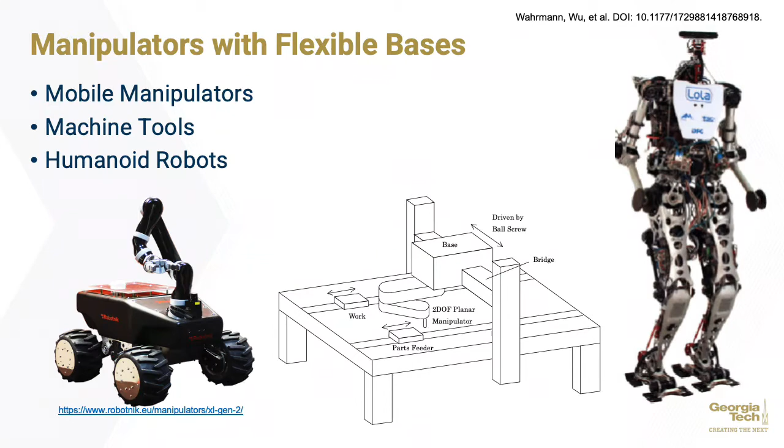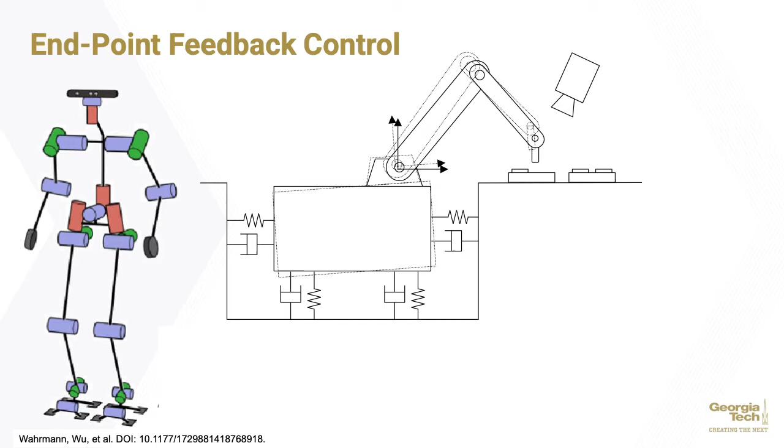We are interested in robust control of a manipulator on a flexible base. The base of the link mechanism is not always rigid in many manipulator systems, such as mobile manipulators, machine tools, and humanoid robots. We want to apply task space control of the end effector for precise positioning to a flexible base robot. Again, the flexibility of the base comes from the mechanical compliance.

If the base is also controlled, its servo stiffness can also be a source of flexibility. Even if the manipulator itself is rigid, dynamic coupling between the rigid arm and base makes the system difficult to control due to the flexibility.

I also want to mention that flexibility is difficult to measure or model in general due to a lack of high-fidelity model or simply sensors, making model-based or sensor-based approach practically impossible.

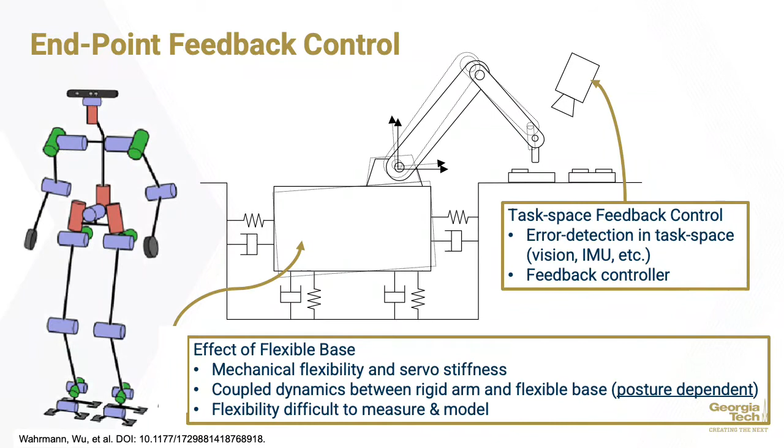To perform task space or Cartesian space control, we can use a sensor such as vision or IMU to form a closed-loop system. Note that manipulator systems, including humanoids, are redundant, meaning that multiple kinematic solutions achieve the positioning of the endpoint. Here, the question is, how can we optimally choose a posture so that we can stabilize the feedback system?

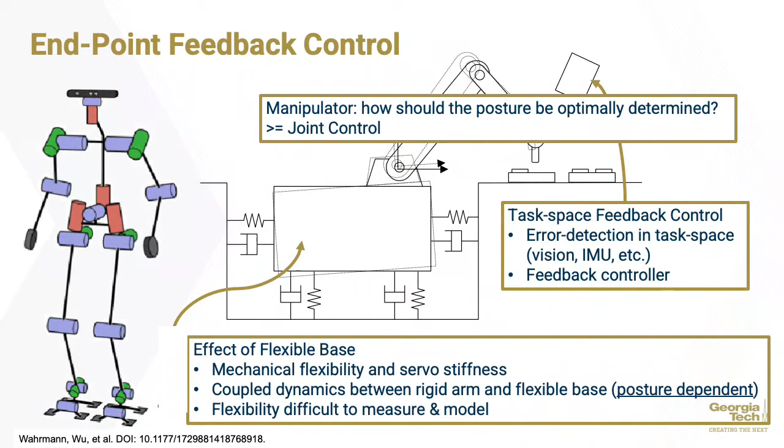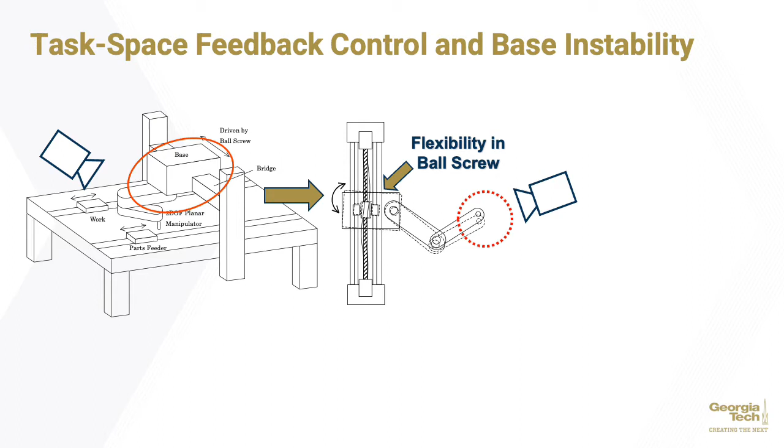The goal of study is to stabilize the feedback system by using as simple control as possible, such as task space feedback. In other words, is it allowed to neglect complex flexible base dynamics and form a closed-loop system, simply assuming that the system is completely rigid? It is not usually the case, because the flexible base robot is not a collocated system.

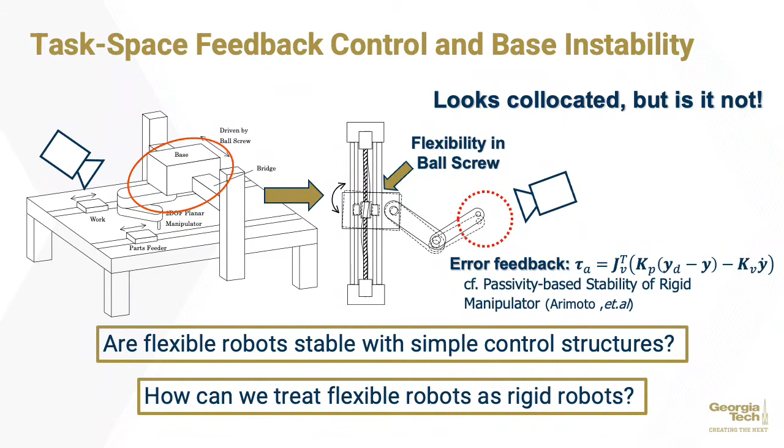Our approach is to evaluate the posture-dependent robust stability of a linearized model about the endpoint. We specifically use the margin proposed by McFarlane and Glover that identifies all stabilizing controllers. Regarding the arm postures, we expand the concept of robust arm configuration to determine the optimal posture.

Unlike many other numerical applications of H-infinity robust optimal control design, we present an analytical expression of the stability margin for a rigid body system and consider flexibility as a fluctuation.

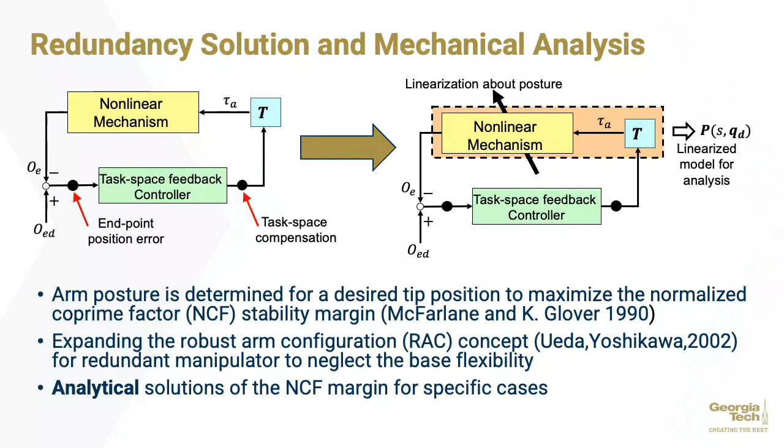We just want to give a quick review of a well-known concept about actuator sensor collocation, which is related to the positive realness of a LTI system.

If we put the sensor and actuator on the same body, the system is called collocated and known as favorable for closed-loop stability. If collocated, the phase difference between the input and output is within plus minus 90 degrees, also called in phase or minimum phase, which is equivalent to passivity of linear systems.

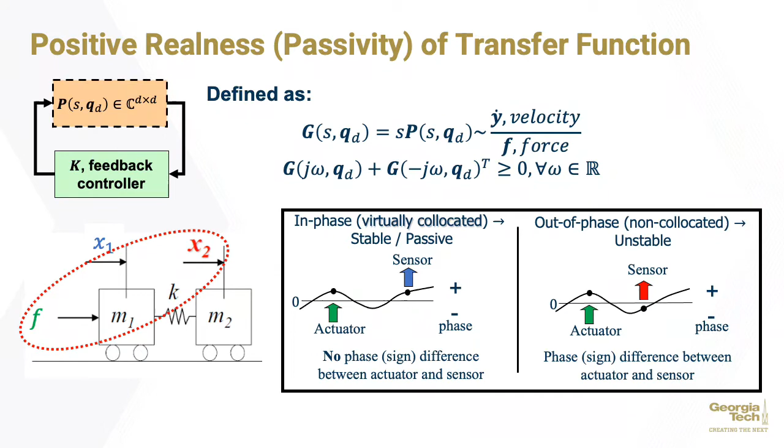On the other hand, when the sensor and actuator are on different bodies and the flexible element is between them, the situation is called out of phase, and the closed-loop system is most likely becoming unstable as the feedback gain increases.

Our interest is to extend the concept of actuator sensor collocation to multiple input, multiple output systems. Now the system dynamics is represented in the modal decomposed form.

We first see that the rigid mode is trivially lossless due to a positive definite inertia matrix, which is a well-known property. For the flexible modes, we can achieve a condition on the flexible mode shape, wherein if the coefficient matrix R is symmetric and positive semi-definite, the mode is passive.

This implies that it's possible to select a posture to achieve systemic passivity for all flexible modes. While this metric is useful, its utility is limited by the modal frequencies in the system and in the ability to do total in-phase design.

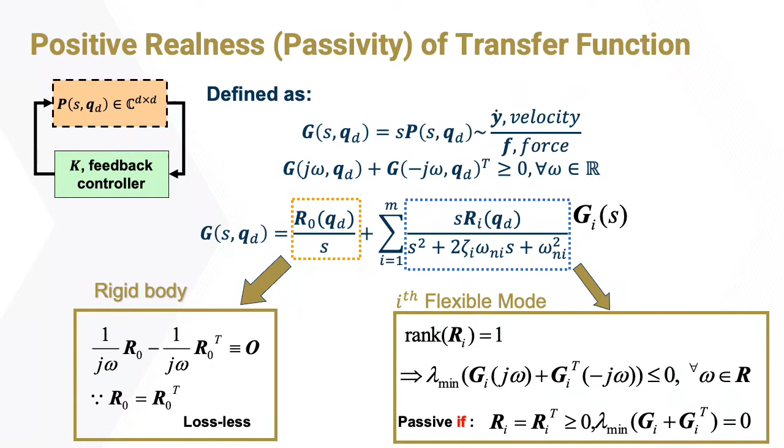For the case of MIMO systems, it is very unlikely that all flexible modes are totally in phase. An easy example to look at is this planar manipulator with 3 base flexibilities in x, y, and angular directions. The in-phase property can be evaluated across the workspace for each of its flexible modes.

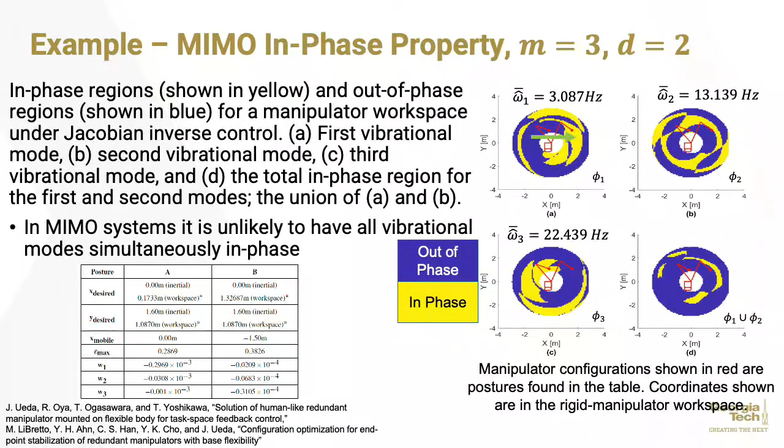The regions of these plots in yellow are regions in which the mode is in phase, and as you start to consider these modes simultaneously, the likelihood that there will be postures that are totally in phase begins to drop significantly. This problem is navigable if you have modal frequencies that are particularly far apart, which would allow the control designer to avoid excitation of those higher modes, but overall, the selected posture would still not totally be in phase.

As an alternative to the passivity index introduced previously, the normalized coprime factor stability margin can be used to describe the stability of the system on a whole. Well known in H-infinity theory, this metric describes the stability of the minimal system described by the normalized coprime factors of the open loop plant P, as well as the system's robustness to modeling errors.

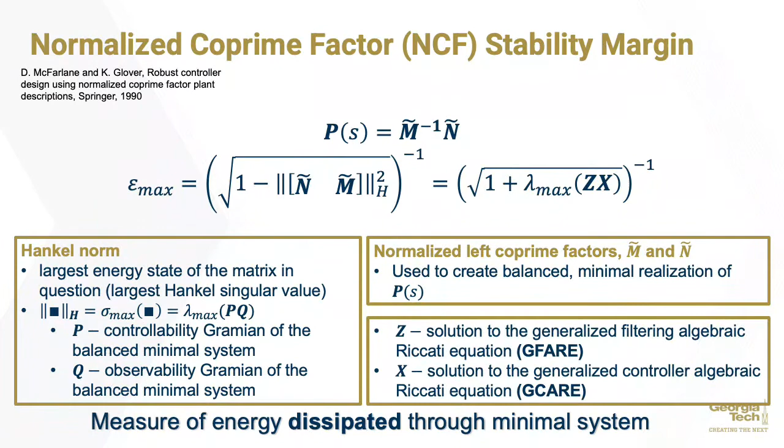At its center, the NCF stability margin requires the computation of the Hankel norm of the concatenated matrix n tilde m tilde. Or equivalently, one can use the quantity on the right, which is dependent on the solution of the generalized filtering and generalized controller algebraic Riccati equations.

The solution of Riccati equations is generally done numerically, and even then, solutions are not always guaranteed. But because we're working with systems that are balanced and minimal, we're guaranteed a solution, and moreover, the stabilizing solution is guaranteed to be symmetric positive definite.

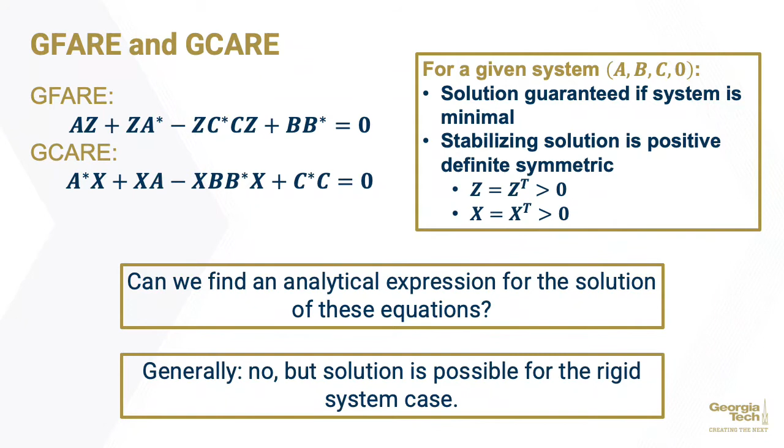The biggest question raised by all of this is how we can make definitive claims about any of these systems. For that, we would obviously need some analytical solutions so that we can make proofs one way or another. This is generally not possible, but for the class of all rigid or double-integrator systems, we have solved both the GCARE and the GFARE to find a definitive solution for the normalized coprime factor stability margin.

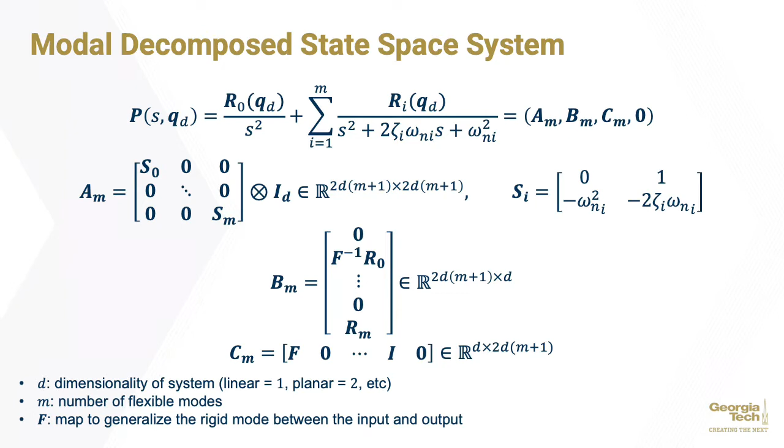As one last preliminary, it is necessary to realize the modally decomposed transfer function into a state space system. For a purely rigid system, however, we can truncate the necessary parts of the AM, BM, and CM matrices, taking care to leave the system general through using a map, which we call F, to change the distribution of the rigid mode between the input and output sides of the state space system.

As a motivating example, we can see the NCF stability margin applied to an SISO system and a planar 2R manipulator. In each of these, larger values indicate a more stable system, and in the case of MIMO systems, we can evaluate this metric at every point in the system's workspace.

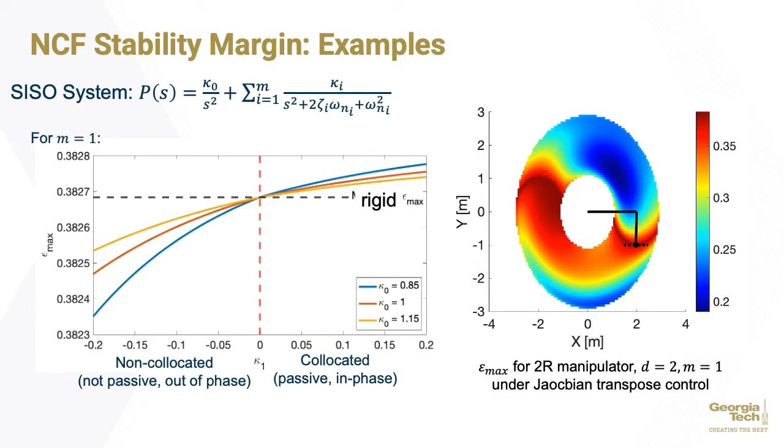Looking at the SISO system on the left, we see a clear division in the stability margin between non-collocated and collocated systems, and this boundary occurs when the system is purely rigid. This value very clearly occurs at the intersection of the above curves and seems to be constant for all values of the rigid mode.

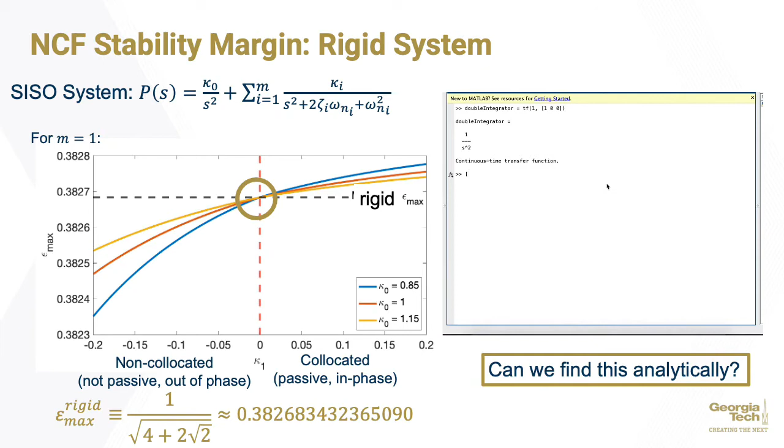This is evidenced by the evaluation of the NCF stability margin for myriad rigid systems in MATLAB and can be done using the NCF syn command. Overall, this sets a very clear performance indicator as to whether or not a multimodal system performs better or worse than its rigid subsystem. In evaluating both the GCARE and GFARE for a rigid body system, we find that the characteristic equation is equal to lambda squared minus 6 lambda plus 1 quantity raised to the n.

This means that the polynomial itself is constant with roots of multiplicity equal to the number of rigid body modes in the system. When evaluated, the maximum root of the characteristic equation yields a constant value of 1 divided by the square root of quantity 4 plus 2 root 2, which is equivalent to the value found in the MATLAB demonstration.

The important result here is that this value is constant and is shared by every double-integrator system regardless of dimensionality or redundancy. Should the manipulator be redundant, special care must be taken in the map between the task and joint space. However, this will not impact this solution.

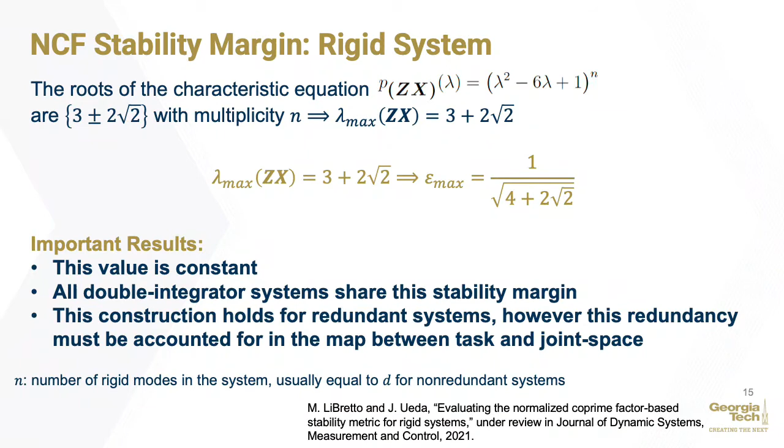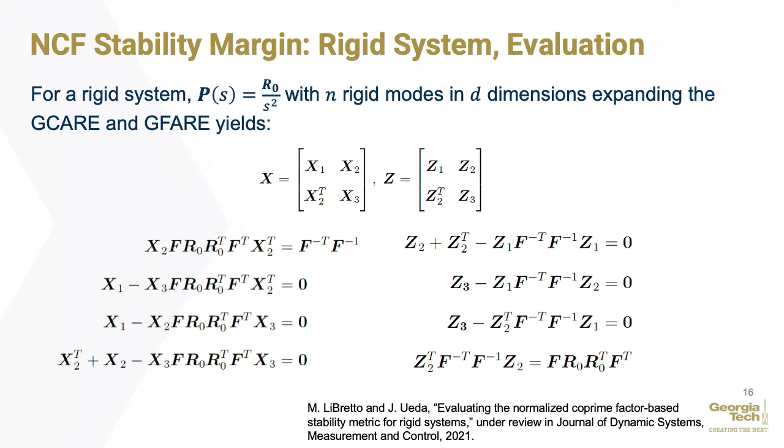We arrived at this result through the simultaneous evaluation of the set of matrix quadratic equations resulting from the blockwise expansion of the GCARE and GFARE. This solution was possible because we leveraged the positive definiteness of the rigid mode to find matrix square roots in the solution of both x2 and z2 first, then followed the rest of the algebra through.

Notably, the solutions of z and x are functions of only the rigid mode and its distribution factor f, and have a reciprocal structure of sorts. Each of the rigid body quantities in the elements of z and x are inverses of one another, and this would even be the case if there was an unequal distribution of the rigid mode throughout the input and output.

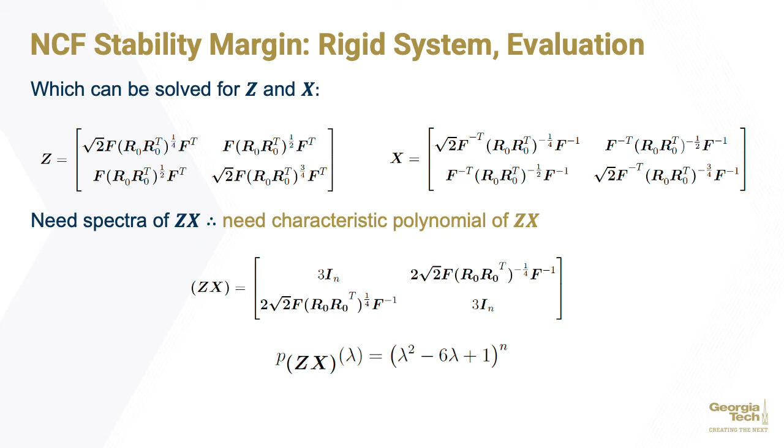When the product Zx is found and its characteristic equation is evaluated, the rigid mode terms and the off-diagonal terms cancel to identity. This results in the aforementioned constant characteristic equation despite the matrix being a function of the rigid mode. After analyzing a purely rigid case, the natural extension is to see what happens upon the inclusion of a flexible mode.

We know from our work with the modal passivity analysis that for a flexible mode to be passive, it must be symmetric positive semi-definite in rank 1. Using this, one can vary the flexible mode so that it remains passive by assigning it the structure shown on the right. In varying this residual and scaling the rigid mode in this way, the NCF stability margin for a variety of in-phase systems can be analyzed simultaneously.

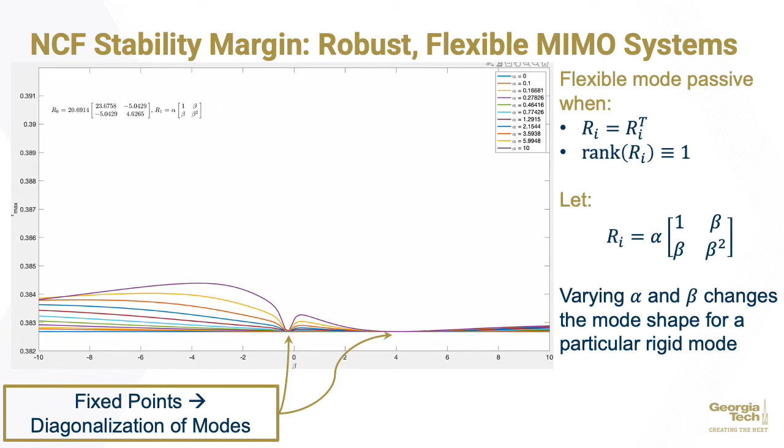It is clear from this graphic that these in-phase flexible systems have stability margins greater than or equal to that of the rigid system, indicating superior performance. Interestingly, however, two distinct fixed points occur in the plots regardless of this scaling. It is for these flexible modes that we can simultaneously diagonalize all modes in the system.

The invariance of these points with respect to the scaling of the rigid mode instructs us that these fixed points are related to the mode's invariant subspace.

Taking a step back and looking at the intuition surrounding the flexible mode as an algebraic structure, when you consider it to be a linear transformation from the input space, whether that is torque or velocity, to the task space, it is easy to see that they always project all inputs onto the span of the same line in the plane when d equals 2 or space when d equals 3.

This line is defined by the generating vector for the passive flexible mode, 1 beta. While an alpha was used in the preceding analysis, we are more worried about the span of the vector here, so the alpha may be omitted.

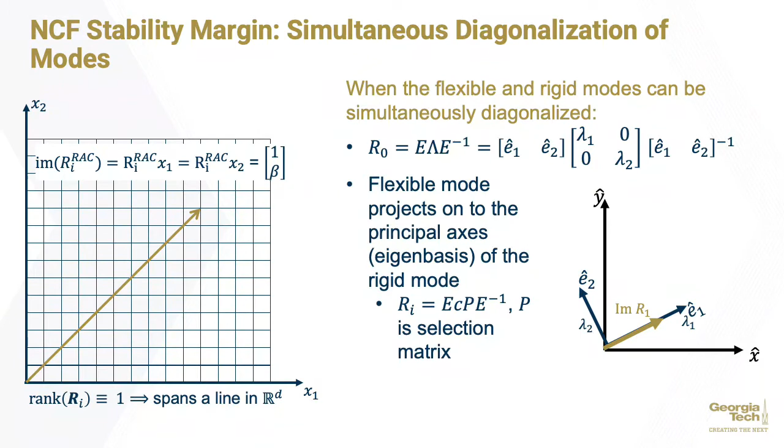When the generating vector lies along any of the principal axes of the rigid mode, that would be the vectors comprising its eigenbasis E, we can diagonalize the flexible mode so that it takes the form of the similarity transformation of a scalar times a selection matrix P.

Substituting this relationship into the transfer function representation of the flexible-body system, the expressions for each of the modes can be expanded and the basis can be factored out.

After the change of basis, the system can be recognized as G prime, which is diagonal in the invariant subspace of the rigid mode, and all of the subsystems on its diagonal are SISO. This indicates that within this eigenspace, the actions of either axis are decoupled, and the subsystems can be analyzed independently.

This diagonalization is analogous to converting the robot in question into a Cartesian robot. Each of the axes can move independently and act without inducing motion in the other for both rigid body motion as well as any induced oscillation.

It is for this reason that we can say that the overall system is only as stable as its least stable part. So how can we show that?

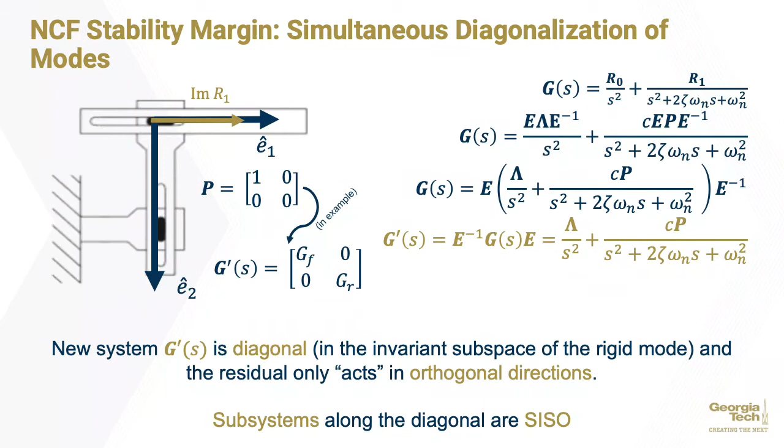If we realize the transfer function G prime as block diagonal matrices of conformal size and evaluate the GCARE and GFARE, we find that they have block diagonal solutions because of the decoupled subsystem dynamics. Therefore, the resulting characteristic equation is the product of the characteristic polynomials of each of the subsystems in the aggregate.

It is for this reason that the NCF stability margin becomes that of the subsystem with the largest root, and therefore the lowest stability margin.

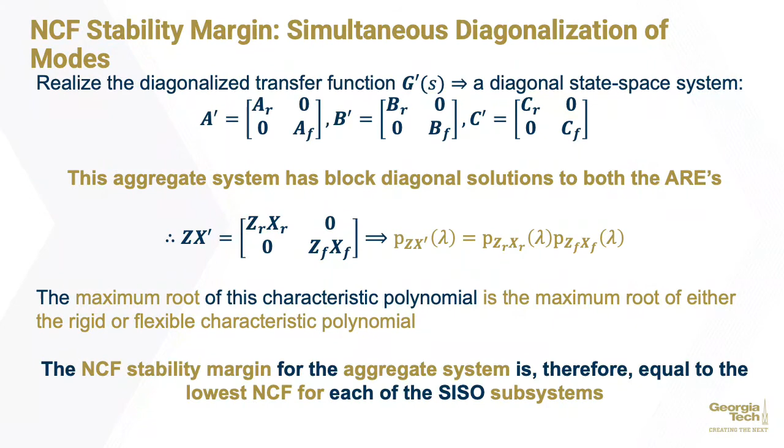While this is good for analysis, it is an overwhelmingly special case. Should the basis through which the modes are diagonalized be not orthogonal, there will not necessarily be decoupling and this solution may not hold. Returning to the earlier motivating example, we can see this in action.

Here we have a system with an in-phase flexible mode and a rigid mode. When we take the eigenvectors of the rigid mode and put them into the same form as our generating vector, which is 1 beta, we get two possible generating vectors that will force the flexible mode to project onto the principal axes of the rigid mode.

At either of these values of beta, 4.0258 or negative 0.2484, we see that the NCF stability margin is that of the rigid mode, which is notably less than that of an in-phase flexible mode, meaning that the NCF stability margin took the form of the less stable subsystem.

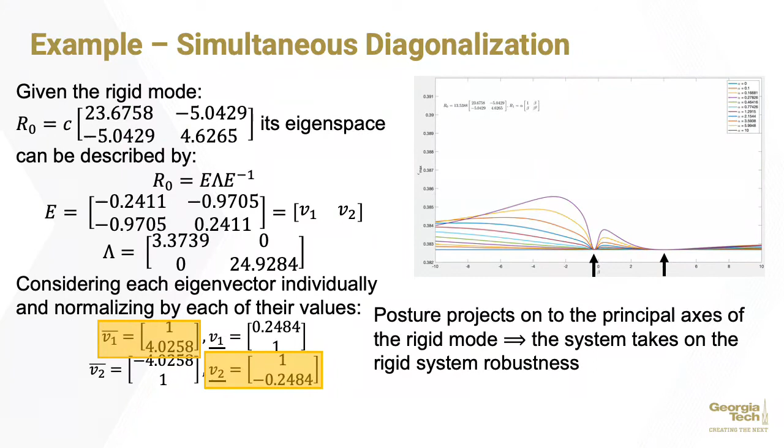This material was included in previous work published in ASME Letters in Dynamic Systems and Control. There we used the NCF stability margin to select postures of high robustness that will result in low magnitudes of induced base oscillation for a remote planar manipulator with 3 degrees of flexibility in its base and a planar redundancy from a mobile undercarriage. As stated previously, the NCF stability margin can be applied to the workspace of a manipulator.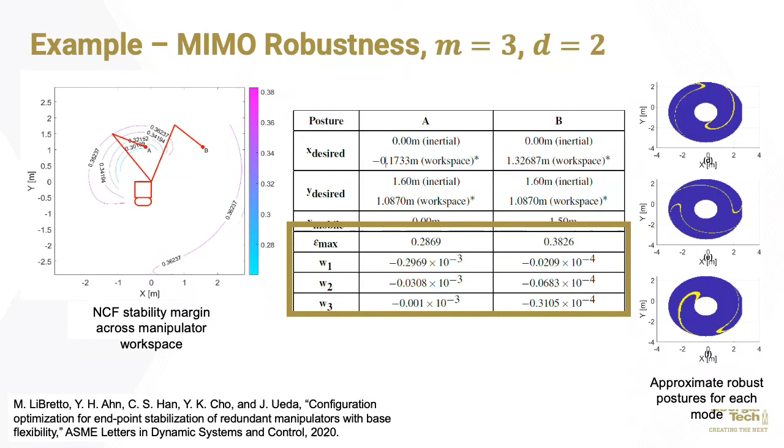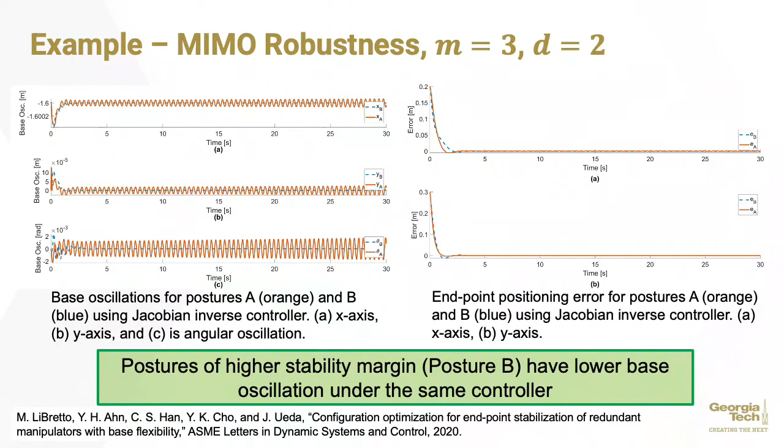When given a position regulation task for each of the postures A and B, the posture of higher robustness demonstrated lower magnitudes of induced base oscillation compared to the posture of lower robustness when using the same feedback controller. This supports the use of the NCF stability margin to select postures that have a higher overall stability.

As a result of this work, the value of the NCF stability margin for rigid systems was proved to be constant across all double-integrator systems, and the concept of simultaneous diagonalization of modes was proven. Overall, this provides a numerical performance target when discussing systems with flexible modes.